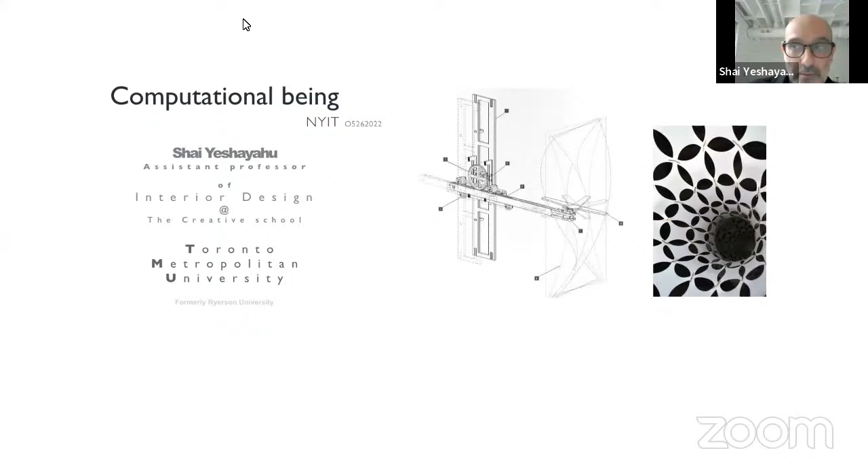Thank you, Pablo. It's great to be back. I think it's the same group that we did the workshop with, right? Yes, exactly. Yeah, it's fantastic to be back. Hello, everyone. Being an alumni, I have to kind of say it. It's kind of coming back and lecturing. So it's always a great energy.

And to support the MS in Architecture Computational Technologies program that you guys are taking, which I think is one of the most cutting edge sort of programs, or at least in themes that are really prevalent to our times. So you are engaged with the most current of current, so to speak. However, despite this online platform that precludes me from inhabiting your physical space, although I think none of us is in a physical space, I have thought a lot about this condition.

Although many believe it's okay, I don't believe as such. At least for me, it is not, because in some very specific way, this lecture is given by me, or at least intended to be given by me, in isolation, while all of you are collectively discussing ideas as a group, or soon will be, I guess, because you are on your summer vacation. Or maybe because the space of lectures in general have changed the ways we experience or encounter knowledge. And I want you to stay with me on that thought as I seek to explain the kind of environmental, social, and cultural shifts conditioning the ways we gain skills or develop tangible practices.

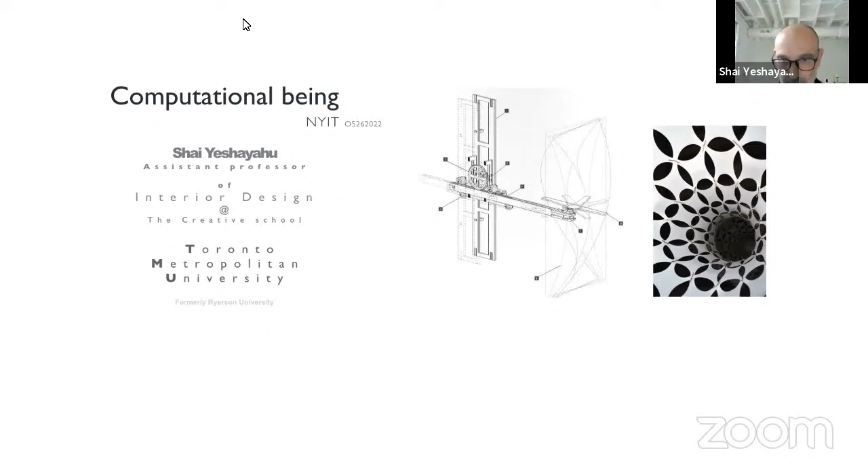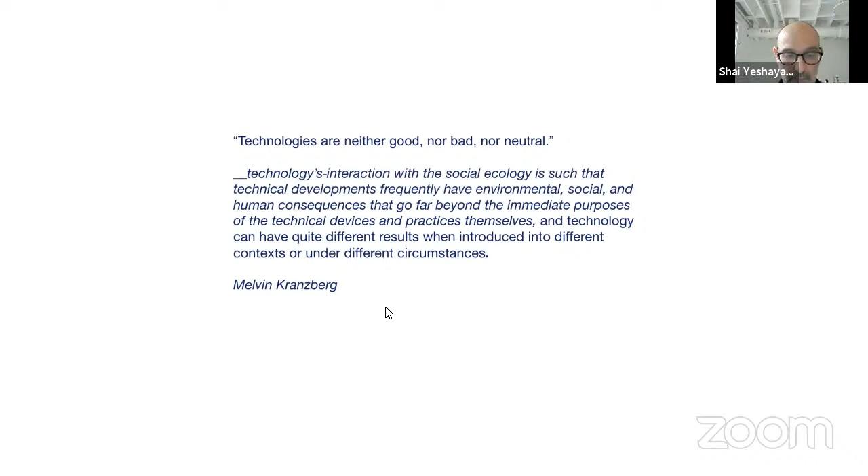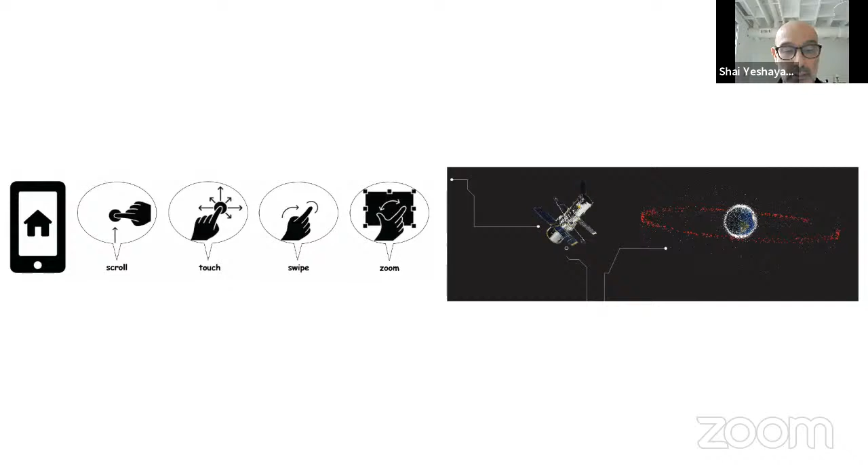In this regard, Melvin Kranzberg, a historian of technology, explained that technologies are neither good nor bad nor neutral, has triggered the specificities of this talk. He pinned the condition of our spatial definition in ways which I have come to recognize as computational acts. These computational acts originated millions of years ago, and they are not features from the arrival of the cell phone or microcomputer, not even the launching of the first geosynchronous satellite. And do not misconstrue this statement—each of those debuts are extremely important to our design discourse.

Yet the narrative of computational acts centers on a set of bones named Lucy, after the song 'Lucy in the Sky with Diamonds' by John Lennon, first performed by the Beatles and playing on the radio when paleontologist Donald Johanson was celebrating his finding with his colleagues. Lucy's bones evidence that humanoids are the first among our sapiens lineage to become bipedal and fully digital.

What that means to us in the design world is that mobility holds a superpower for all humanoids and perhaps even robots. That superpower started with the development of long thumbs and the ability to touch the other fingers, which in turn allowed us to firmly grasp, manipulate, sense, and control the things we find and shape.

Furthermore, being bipedal surrenders us with the ability to move in an upright position and to walk long distances. This ability provided a wider field of view that helped to scan the landscape around, leading to the recognition of environmental patterns.

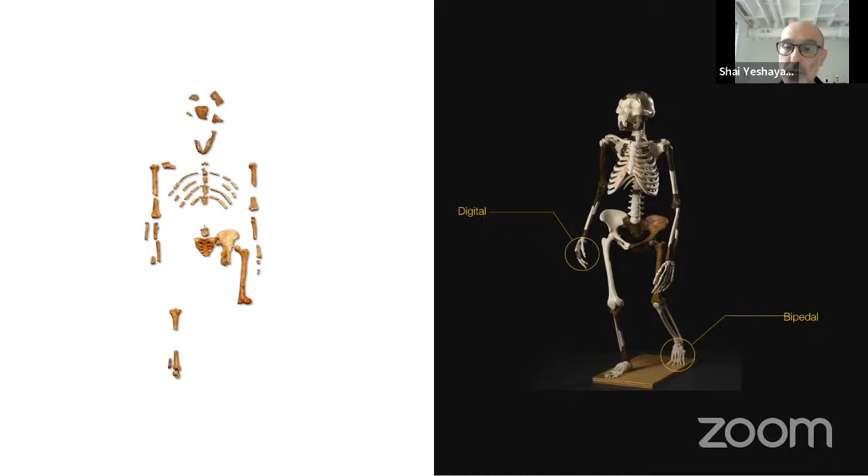In 3.2 million years, Lucy's kin learned to decode, code, and recode Earth's surface. They first navigated in the savanna, and then they learned to reproduce Earth's bounty as they moved across continents. By the year 10,000 BC, roughly 12,000 years ago, Lucy's descendants developed the first sedentary system that we now define as husbandry—cultivation of crops and animal breeding, which is also the rationale that propelled the invention of the room.

These rooms became cities, empires, and economic hubs that led to the emergence of the global city. At every one of these stages, social and cultural innovation gave rise to advanced technologies that shaped and formed the characteristics of the computational being, or the computational acts into being.

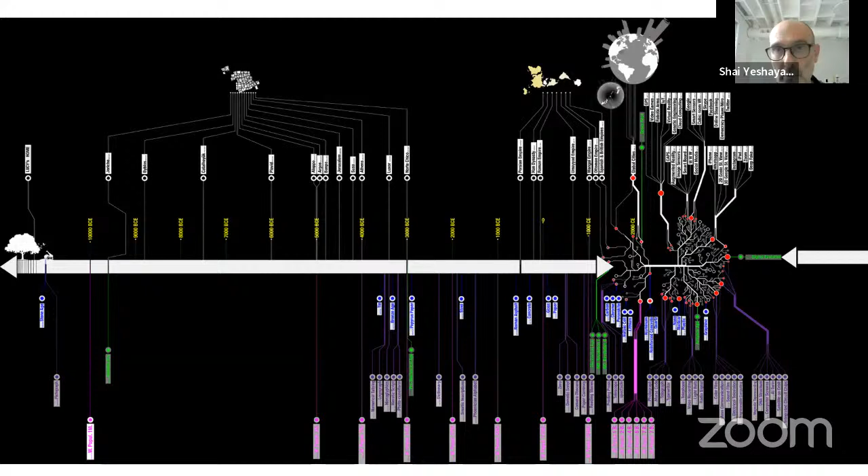This computational being has roamed Earth progressively, programming tasks that now a computer is able to decipher with ease. In this context, I will argue that sapiens are computational beings that in less than 500 years advanced light from candles to kerosene lamps, electric light bulbs, and to solar panels.

Transportation methods evolved from horse-powered to steam-powered locomotives to electric trolleys to gasoline-powered automobiles and electric vehicles. Communication systems like pictographs on cave walls, alphabets, books, telegraph, phones, and apps were propelled by knowledge and technologies.

As you can note, in less than 25 years, we have become avid miners of data, capable of mixing and matching knowledge that enables us to experiment with technologies.

As computational beings, you and I have reached a moment in which we can go back in time to understand the different technological atmospheres we have produced, and to grasp the spatial interest each of these technologies serves or served. We can see how applied knowledge produces different circumstances.

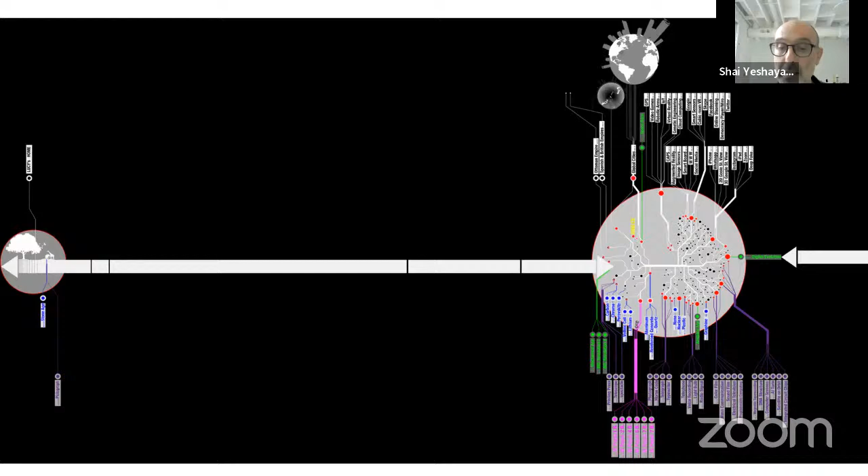And if we look at the history of our design processes, we can realize the duration of time it has taken us to get here. Hence, the question we are facing is not how did we get here, but how do we proceed from here?

Because it is evident that in less than 50 years, we have arrived at a digitalized condition that has radicalized our design practice. In less than 25 years, the computational being, in tandem with social-cultural aptitudes, has evolved into a manifold of modalities—ways of acting and generating multitudes of solutions.

In my case, as the system of communication evolved, so did the focus on ancient, local, and emerging knowledges. And this impact will be illustrated through three projects to render a provisional argument about the relationship between the morphogenesis of technologies and design thinking.

It is a kind of self-reflective tool, a tentative approach to look at innovation as an essential medium—or mediums—that in return are helping me to consider a range of circumstances for design thinking.

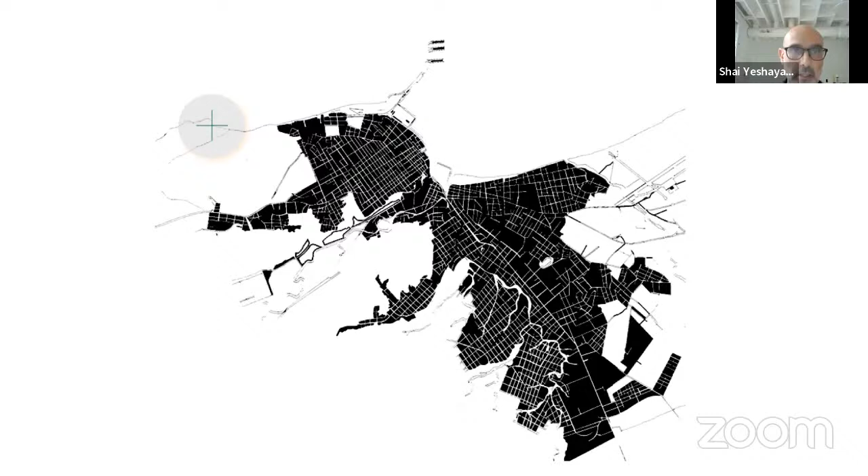Nonetheless, on the ground, the prevalent condition was a lot of use of concrete to laminate the ocean front or the hillsides that face the ocean to avoid erosion, which was a solution that seems a bit odd at the time.

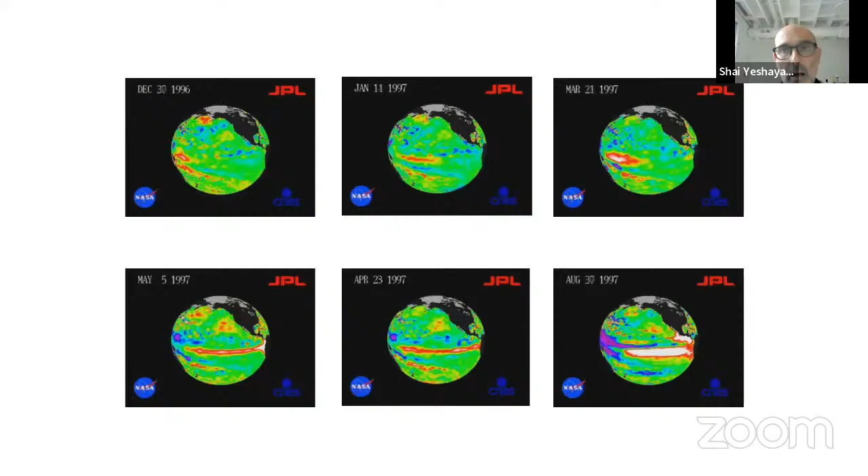We also looked at satellite patterns that were available to us, amplifying specifically here in '96 the phenomena of El Niño, in which warm water starts to approach the Pacific coastlines, creating multiplicities of effects in terms of drought, rains, and so forth, affecting the region.

So for us, we like to look at things in ways that help us understand or plow through what are the important things. So we are building a certain matrix that was interesting to us, looking at forces that have to do with technology, economics, sociolinguistics, and then seeing how they fit into these bodies of knowledge that exist, and how each one has a definition within those bodies of knowledge, constructing this matrix with a bounty of ideas that could be brought into what we want to amplify.

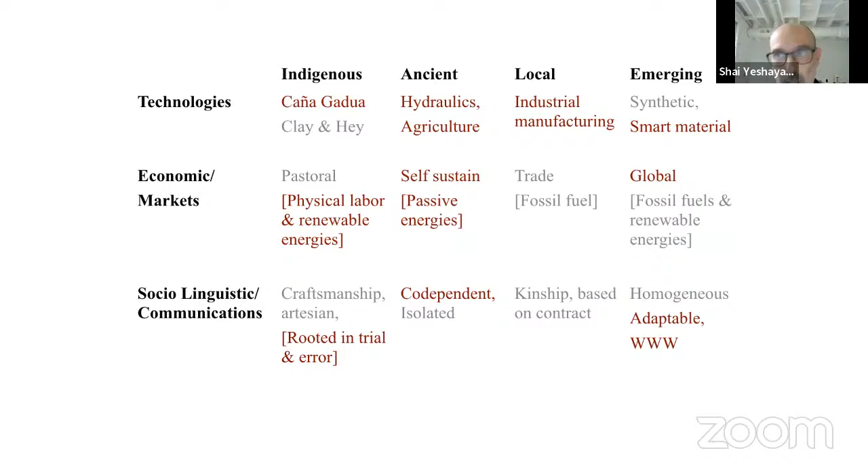Out of those, there are only specific ones that begin to inform the making, the doing, or the thinking about the design. So we constructed a matrix that begins to explain the evolution of a typology, and then the breaking down of this typology into site, circulation, and landscape, bringing all of these elements together to create an object, an optimized object that has ways to look beyond itself and also a way to center things around itself.

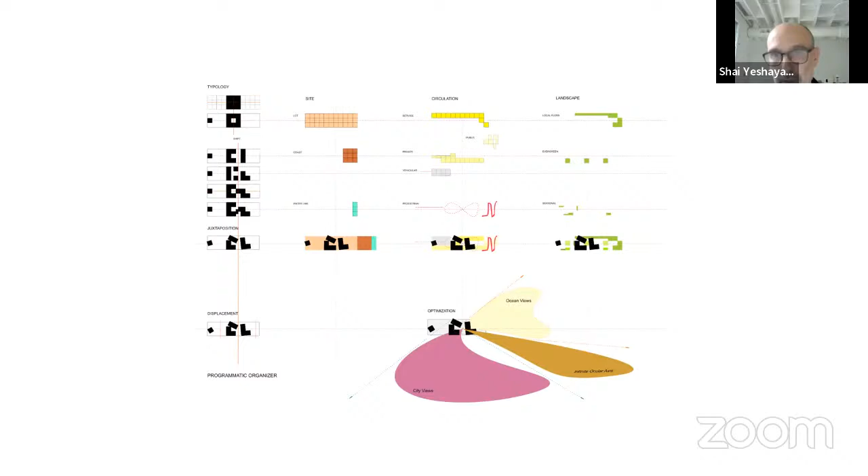So I'm going to focus on the area where the skirt was first treated, and the idea for it came from Machu Picchu. It's kind of like the ways of doing terraces because of the topography of that specific site.

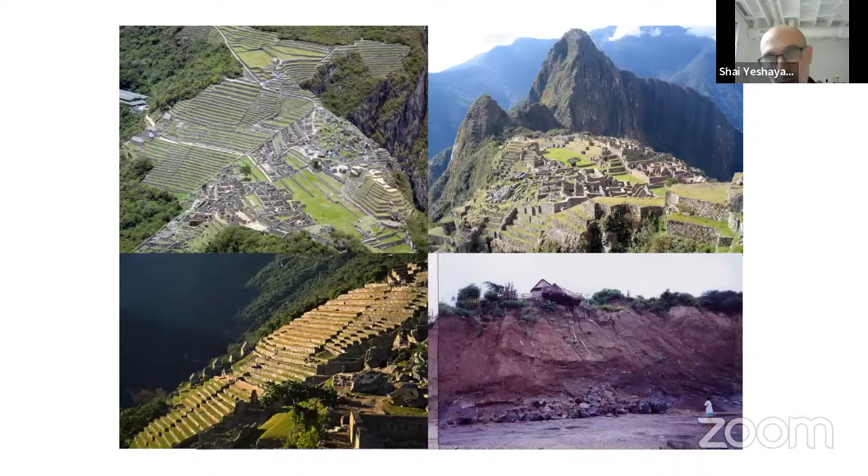And we thought it would be interesting to insert that as a pathway that leads from one place to the other, from the house into the ocean. We began to carve the hillside, and we found a material that is a geotextile, a smart synthetic material, that prevents erosion, and it works in tandem with vegetation.

So we created essentially a substrate to allow for vegetation and this synthetic material to work together to create an ocean front that is predicated on the unit, the house itself, being occupied and livable. Otherwise, the entire skirt also dies with it, because it's contingent upon the users and the recycling system that feeds back into this skirt and allows the vegetation to stay alive, especially in drought time.

There were other features that were incorporated into this idea in terms of natural ventilation, a passive approach to sustainability, and then the digging of a well that allowed for extraction of water at times when water was scarce.

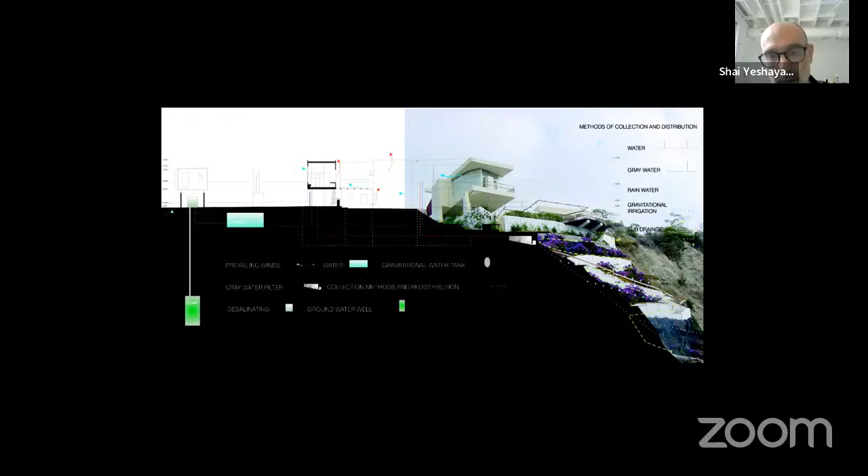Some pictures of the interior of the house, or exterior and interior, negotiating boundaries, which I don't want to discuss so much.

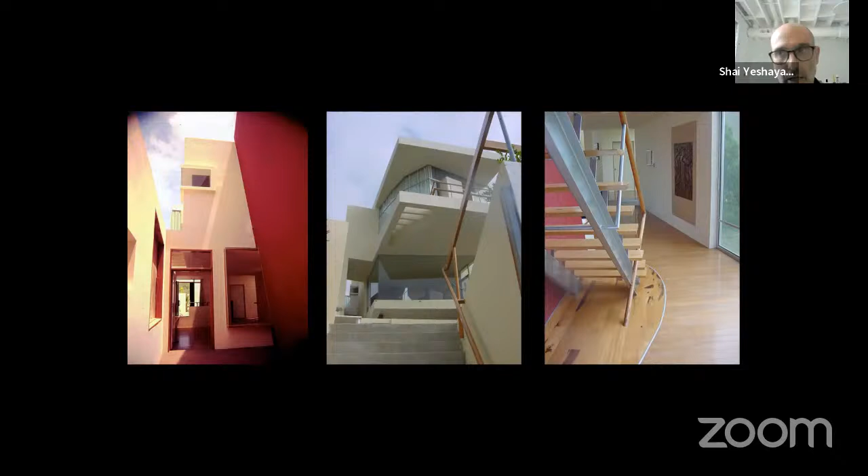And then the object, the house itself, and the relationship to the city, relationship to the ocean—where am I coming from and where am I going to—I think becomes an internal dialogue and an external dialogue within how the house was conceived to act or to perform.

At Hangar 9, which was a music venue in Carbondale, Illinois, Midwest America—it was a town where I was teaching at the university there—a storm, I think it was a tornado, came by and basically lifted up the roof of this building, rendering it completely obsolete, not up to code, and not even able to be thought of as an approach that looks at using the existing to make something new.

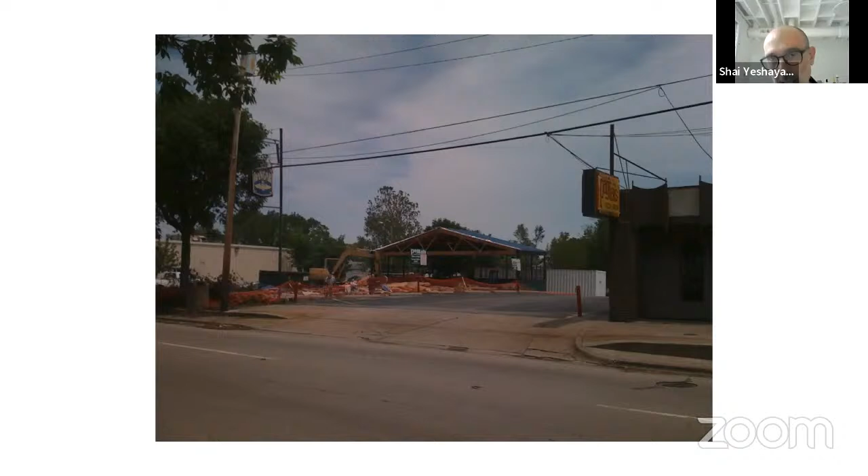That was not possible. The entire building had to be demolished, and because of this opportunity, we wanted to think about what else we could position on this site and how we could play with the intricacy of the program.

The program had three elements essentially: the outside beer garden as they call it, the music venue with the stage, which is on the extreme left in the plan; opposed to it is kind of like a dance floor or a place where spectators could habitat; the entrance zone; and then the bar that parallels that.

And then we were able to add a mezzanine level without adding an additional code complication into the mix of things, because when you add a second floor, there is, depending on how you do this—and we did it in such a way that it was not really a floor, but a mezzanine—and it put us in a place where we did not have to comply with such strict codes, especially when it comes to fire and occupancy.

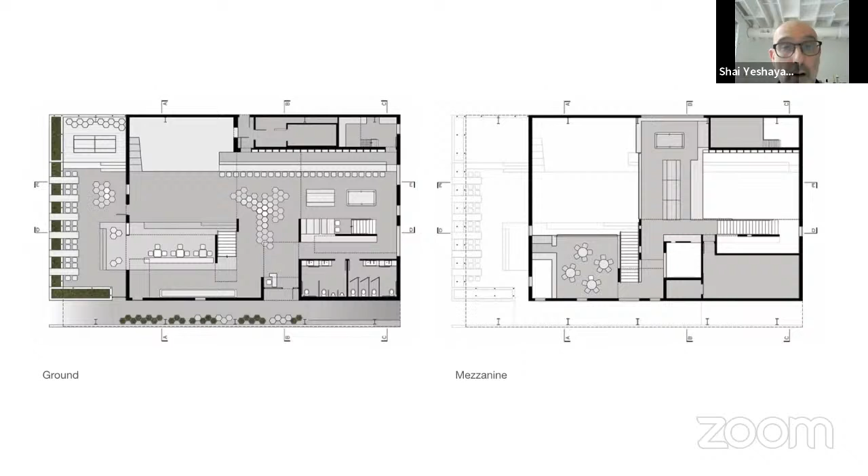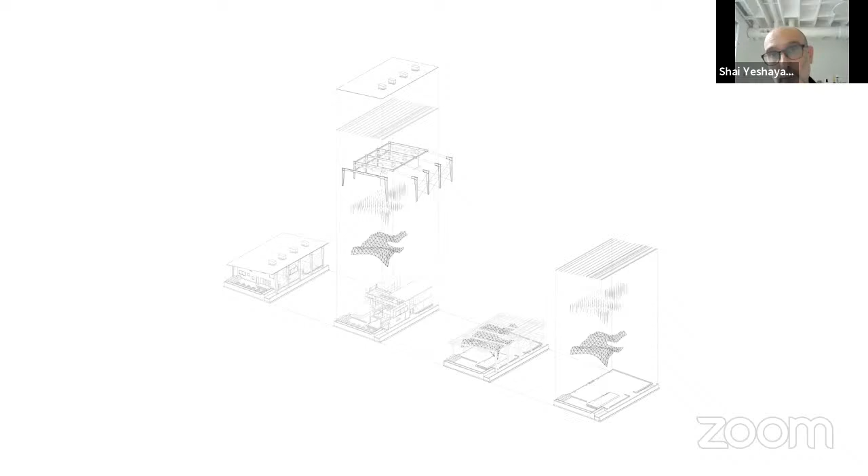Within this building, we looked at a typical steel frame and how we can take this typical steel frame and translate it into a new vocabulary, or compose something new with that same vocabulary. It's kind of like we have a kit of parts. How can we think with this kit of parts in ways that serve us, rather than conform to what the kit of parts gives us?

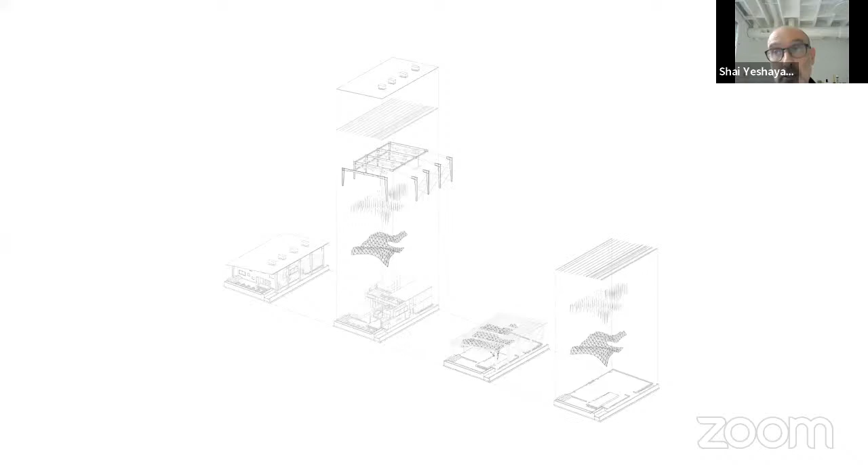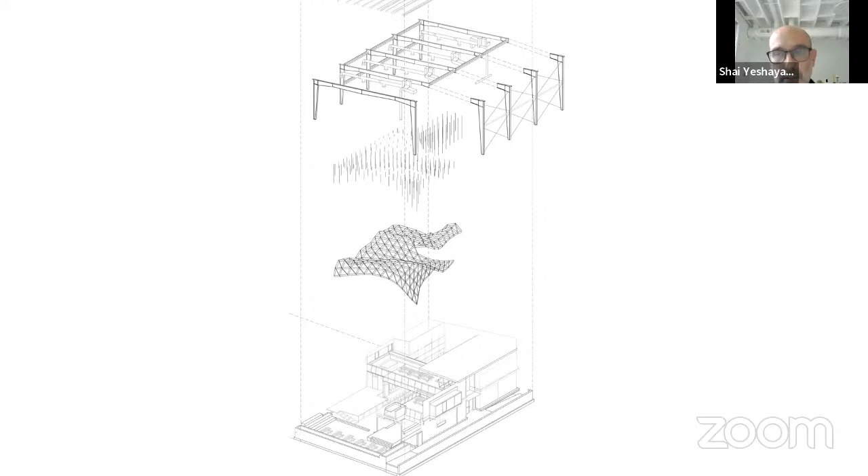Within that, we developed an acoustical ceiling that was part of a response to the musical venue, to allow for an acoustical barrier within the space, or to amplify or improve the acoustics of the space. There's an animation missing there, but that's okay. It was a question of performance and how you allow the space to function while a music venue is taking place, controlling the acoustics to some extent.

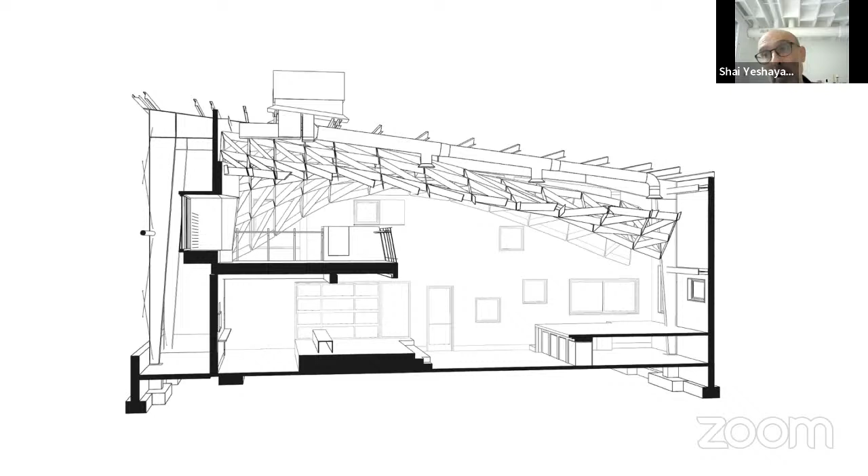So what you're seeing in the center, that mesh, became a ceiling, and the ceiling was optimized to work in tandem within the section. What you're seeing is the stage on the right and the mezzanine on the left, and the viewing platform below that. Here is that animation.

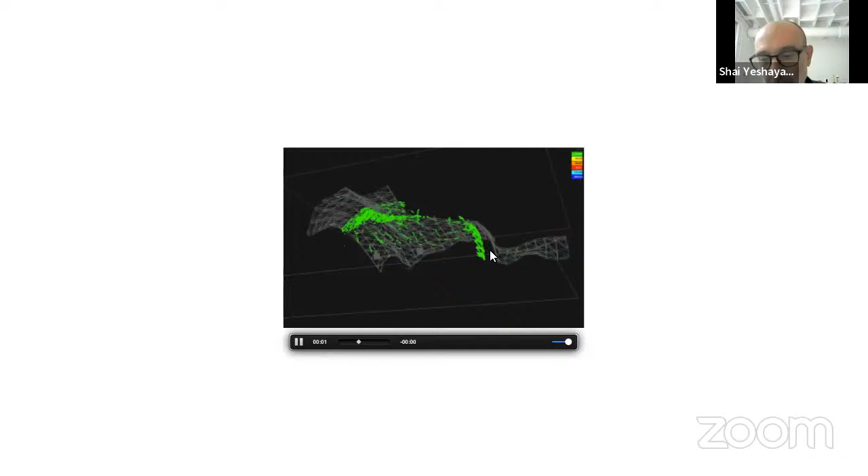We simulated sound from a source, throwing it towards the ceiling geometry, and seeing the amount of reverberation being given back to us, adjusting the geometry based on these readings.

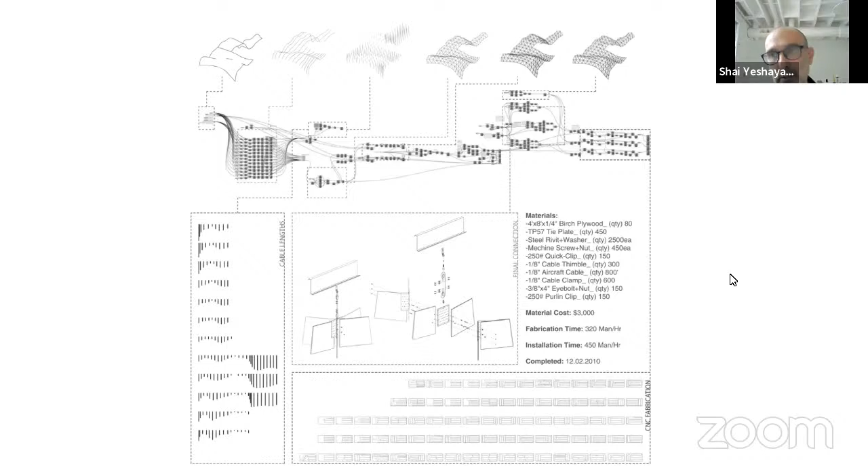Those triangles then had a certain thickness into space. And lastly, the connection, which you see in the middle panel between four struts, was developed around a four-way connector that allowed us to inject this ceiling into the space, for it to provide a blanket that ties the two spaces together, while also providing an acoustical solution to the programmatic need of this build.

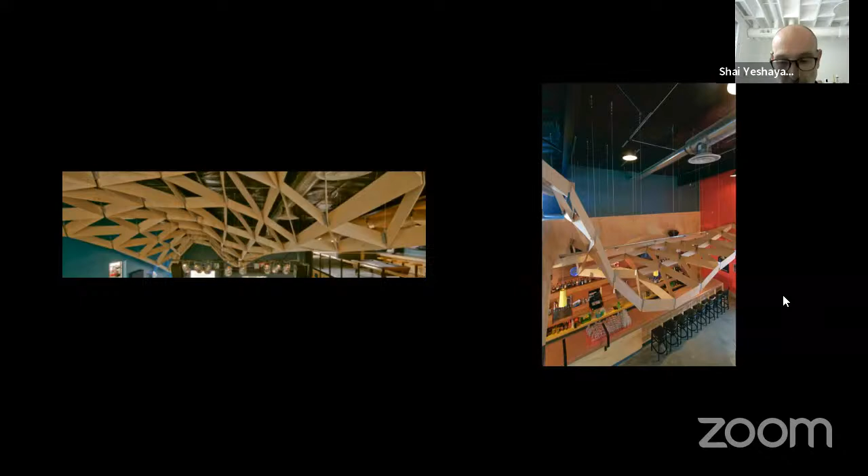The robotic zigzag is essentially the research work in progress I'm currently working on. It takes the zigzag chair, a very iconic chair, and tries to rethink the making of it, which has been done extensively by Rietveld himself, but also by contemporary people like me in this century and the late past century, where this chair has become a fascination as to what material can represent it. For me, it becomes a fascination of what technology can make this chair, and whether robots could take the challenge of folding something that has a material continuity to it and is not broken down.

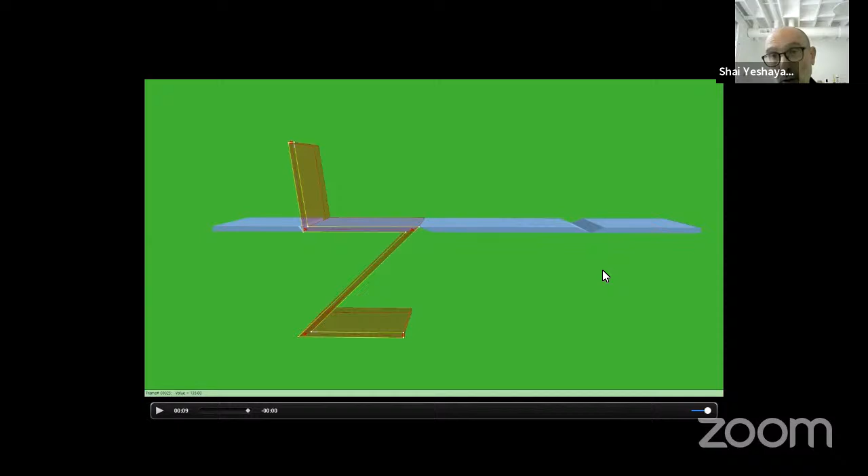Looking at this chair, I began to compare and contrast it to chairs that are not only iconic but had a similar mindset of continuity and flat pack. I think the Ombra Tokyo by Charlotte Perriand is almost like a flat pack - you can flatten everything into one sheet, and it becomes that. You can cut that chair out of one sheet.

And then Laarman, Bits and Parts, a complete 3D printed chair as one piece. So I think that gives the understanding that continuity was important for Rietveld in his entirety of thinking and philosophy - the continuity of space, or the infinite space, which was always at play in his design thinking.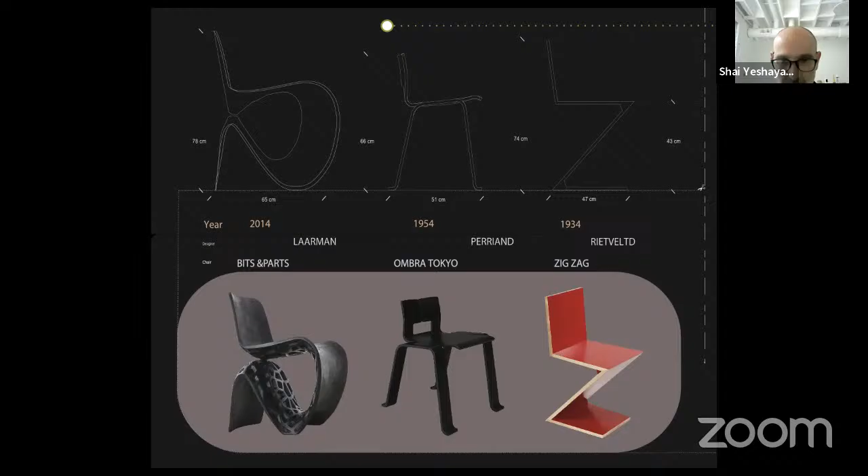Looking more carefully at the construction of this chair at that time, I think it's clear that there was a certain constraint, not just by looking at the chair, but looking at the array of work that Rietveld produced as a continuous experimentation with the way the zigzag can manifest itself through materials, combinations of materials, and the technologies available at the time to achieve something that looks seamless.

Although the first part that is made out of wood looks seamless when it's constructed, it's still made out of single parts that are attached together.

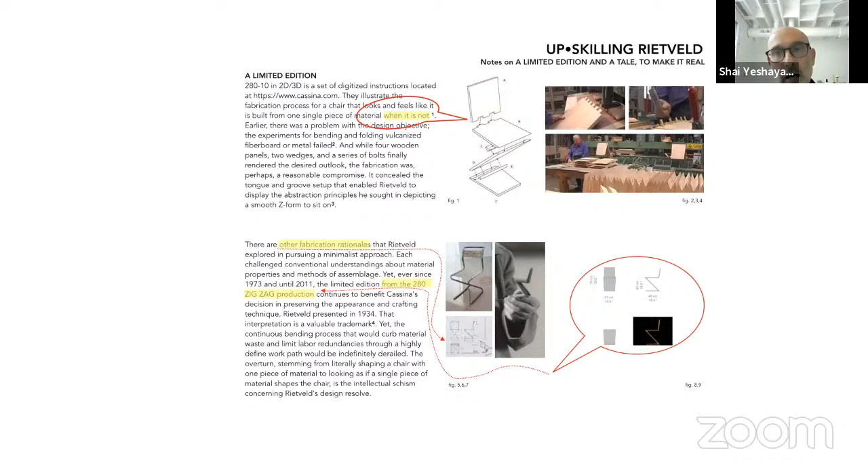The tubular one is one of the interesting propositions. For me, it really represents continuity or infinity in much more clarity. But it's the absence of the planes, and it's more about the delineation of the lines in space, allowing certain planes to exist to allow the seat and the backrest to become what they are. It's more about the construction of a continuous tubular form that then gets additional materials layered into it.

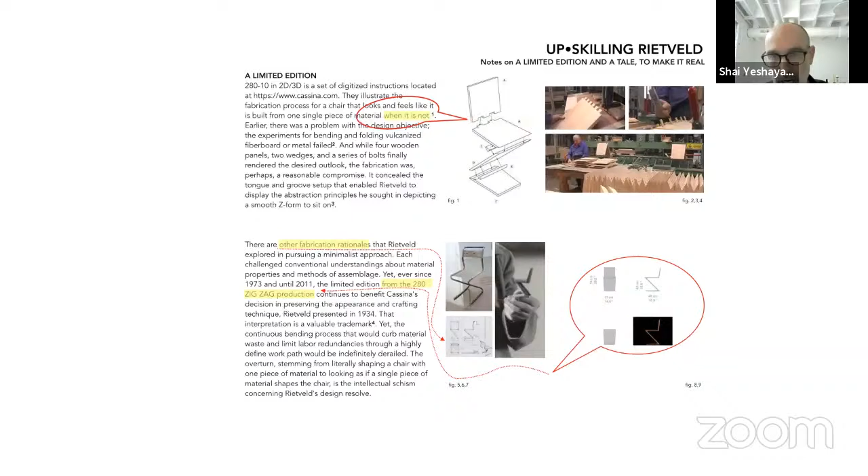Laarman, with his RoboFold, I think has introduced a completely different way of thinking about how we look at patterns and techniques in which robots attach themselves to a pattern and move about a particular axis in space to allow for folding to occur.

What you're seeing here are not really full-scale chairs. Their chairs are about this size, not that big, but it was more like a proof of concept. Can robots really fold the chair? I think that exemplified that this possibility is very much attainable.

For me, looking at all of these arrays of thinking and techniques and understanding about technologies, and what we currently do or did with them, it was pretty evident that the robot will be only one piece within this process.

There were other additional things or technologies that would have to come into place to accommodate for the making of what I wished to explore, which is a continuous surface that gets folded by a robot and allows for the creation of a zigzag shape, not necessarily a zigzag chair.

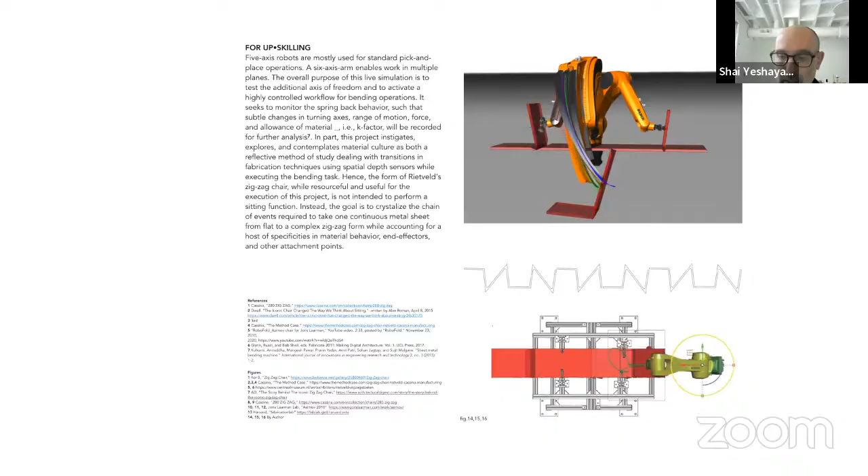So the shape itself is of more interest to me because of a particular constraint I'm going to get to in just a second, that has to do with a uniformity, an ability to create something from a singular material that does not require additional assembly. So the product can be produced by virtue of creating these sheets.

Sort of like the strips. When you unfold the chair, it becomes one strip divided into four segmented parts.

Initially, I was thinking of a jig, sort of like a bed that the robot will perform over, and the bed will have a certain adjustability so the robot can move around it. That proved not to be so effective through simulation, because it required the robot to move quite a bit around the table. It did not serve me in the way I thought it could.

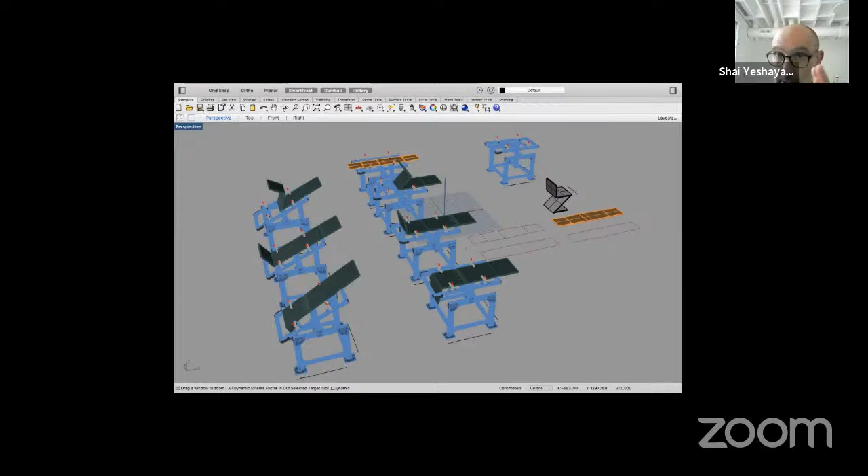It actually created a bigger problem because you never have a fixed bending edge. Therefore, every time it requires a new adjustment or new calibration for every fold, and that might achieve the zigzag shape, but in a much more complicated manner. Maybe there is an easier way to produce this.

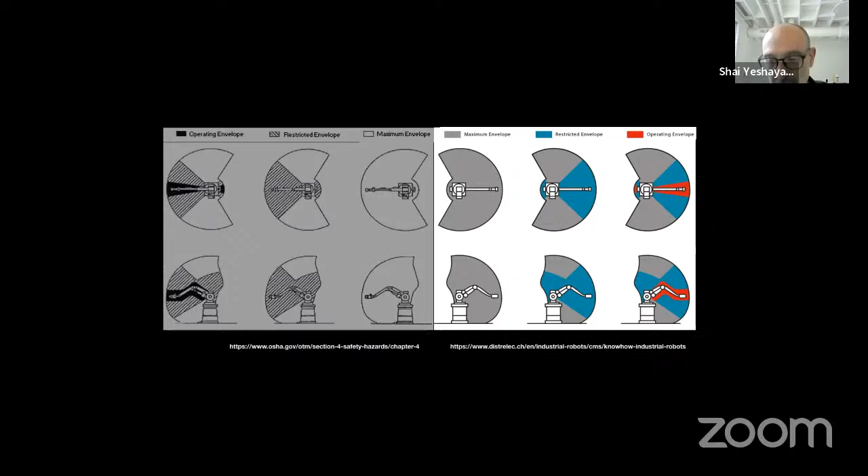At the same time, I was looking at the robot and the environment and restrictions that exist around it. Looking at what OSHA defines as areas or zones of safety around the robot, and what else defines the areas in which the robot performs. You can see the two analogies between how an institution represents this diagram and how somebody from industry who is particularly interested in robotic reach thinks about it. Where does the reach of the robot end, and where does it begin, and how do I work with these constraints?

In terms of just, if I keep bending a metal, at one point it will kind of break and stretch out. So where is that break point? At the same time, I was very curious to understand the spring back. So when you push a metal, there is always a pushback. The material kind of has its own memory and wants to come back.

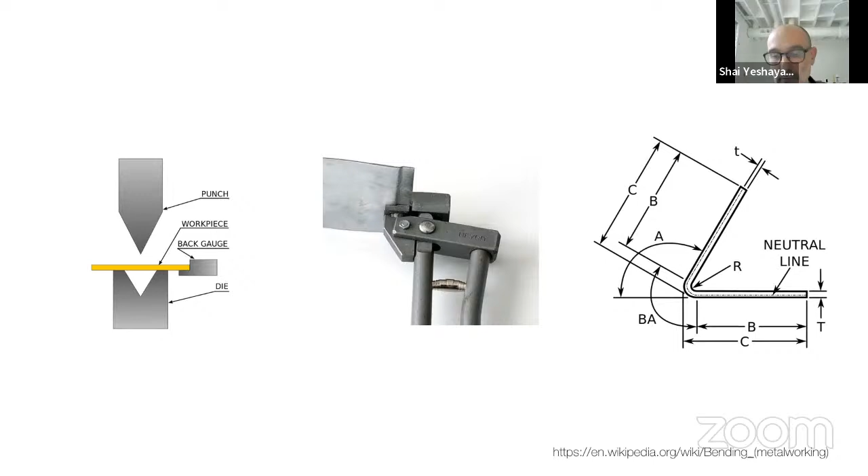That was a factor that became really interesting as I am trying to fold and reach a certain degree, and I'm not able to do so yet because you need to push more to be able to get less. There's about 10 degrees - if I'm pushing an 80 degree bend, eventually I'll be getting something between 70 to 75. There's always 5 to 10 degrees that are somewhat lost because of the material logic itself and how it behaves.

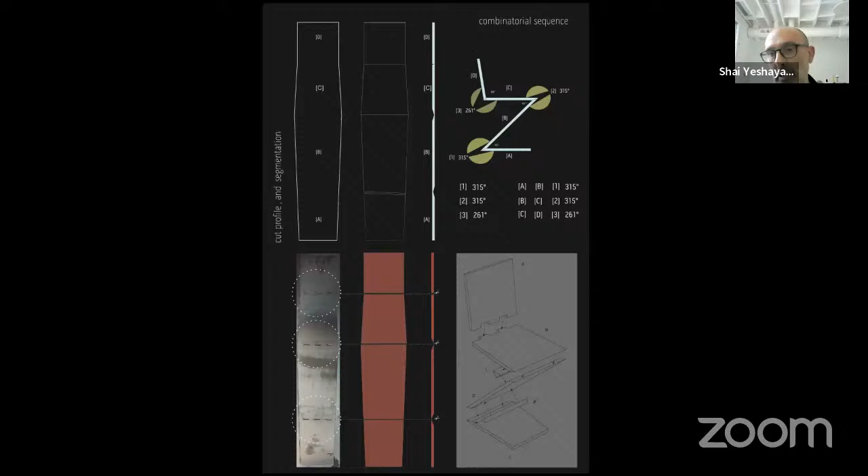At the same time, I began to look at the 3 joinery areas, the angles that exist there, and the complication that brings within it, in the sense of coding a specific system of angles and understanding where does one begin and where does one end. That really has to do a lot with how the robot is working around the chair, or around that sheet of material, to be able to create essentially 3 bends, which are seemingly fairly easy, yet the challenge of producing a 135-degree bend can only be done on an up push as opposed to a down push.

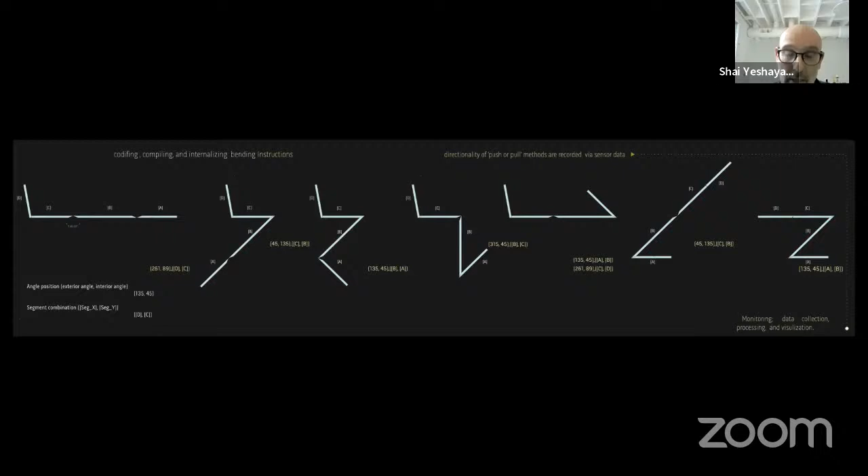Which are those 2 techniques that I'm sort of exploring within this process: one is pulling the material with the robot, or pushing the material up, or the other one is pushing the material down. And that has to do with the specific angle that I want to create, and then working around a particular bending edge that has to be calibrated for this.

So within this process, initially, I thought about doing this with vacuum, with air pressure, which was simulated very easily in this - or at least it gave the understanding that this is very much feasible.

And while this sort of robotic action is taking place, there are various parameters being looked at in real time that has to do with air pressure, monitoring the air pressure. There is also a digital signal between the robot and the computer, allowing for on and off positioning. And then looking at 2 locations of temperature to see a variation of temperature on the material while the bending is taking place, and then timestamps on all of these things.

And at the same time, I was hoping to wire MPU sensors. Essentially what they do is they give you a location in space with 6 parameters. So you have a point that has essentially XYZ multiplied - you have X1, Y1, and Z1. You have a set of 6 parameters for each point in space, which is essentially 4D space, kind of defined within this set of parameters.

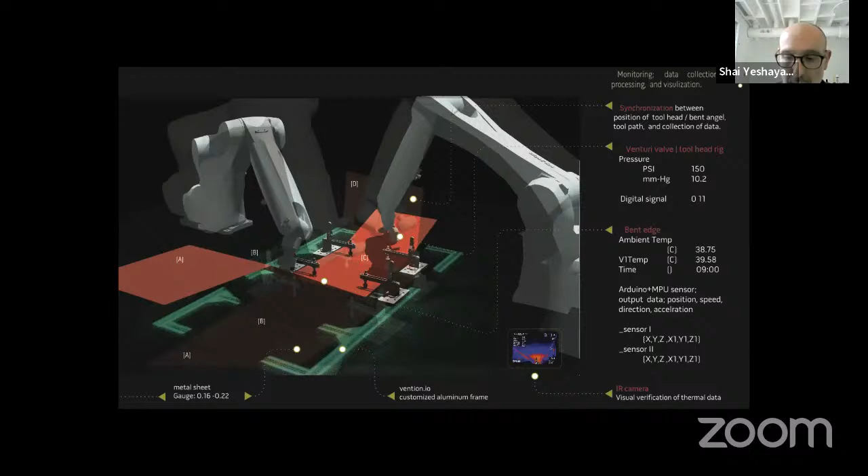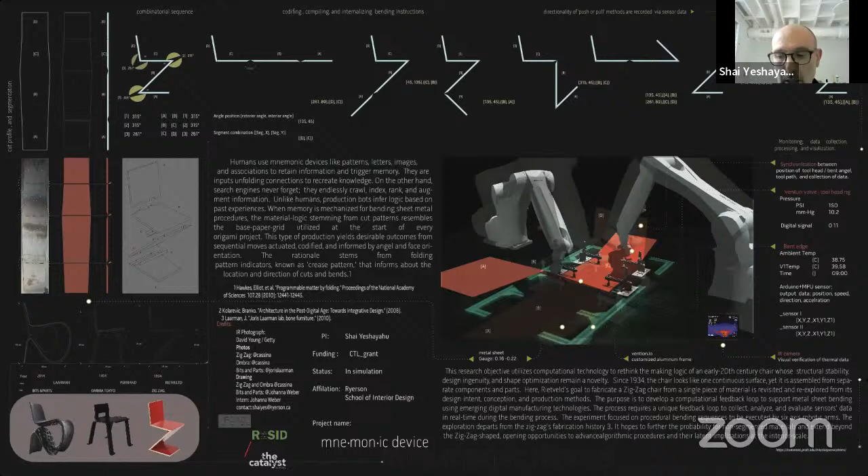It's kind of like the entirety of the board that I put at one stage to look at how, essentially for me, it's really more about the feedback loop that kind of goes back into the left side pattern template, and how the reconfiguration of that pattern, or the rethinking of the code, will then re-inform the processes in which the robot will have to go about to make this zigzag shape.

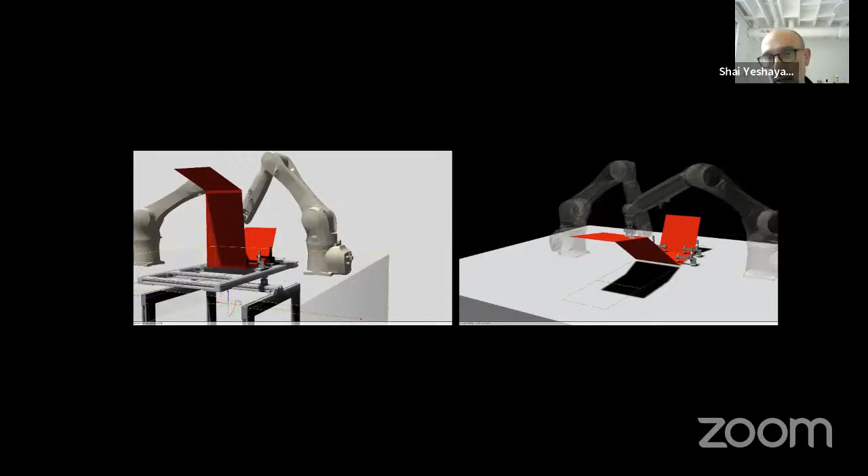So this sort of two animation - one, there's kind of distinct points of view in terms of showing how 2 robots could potentially collaboratively work together using vacuum suction to create this folding. I'm not able to work with 2 robots - we don't have the capability in the lab to synchronize between 2 robots.

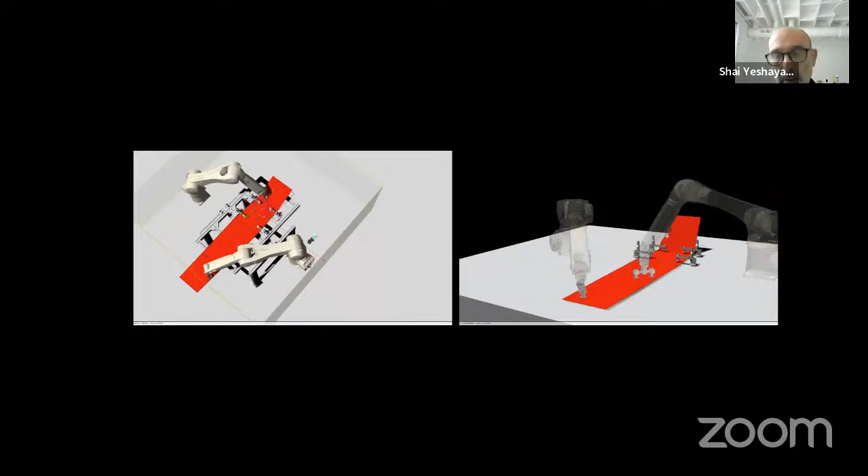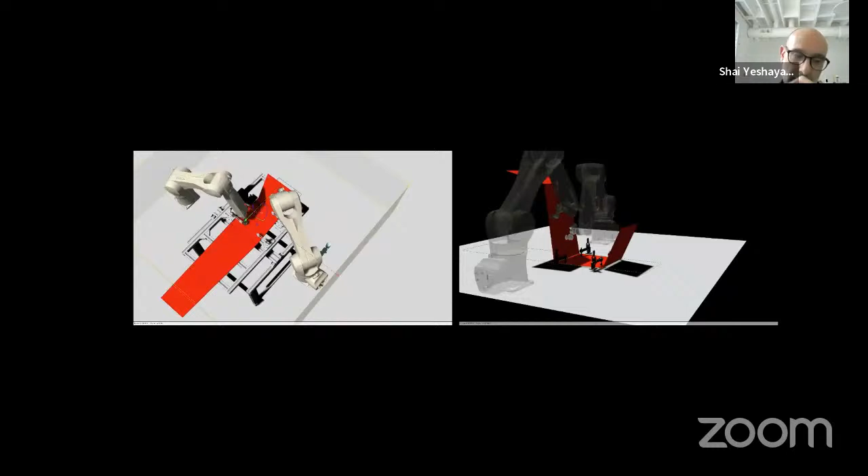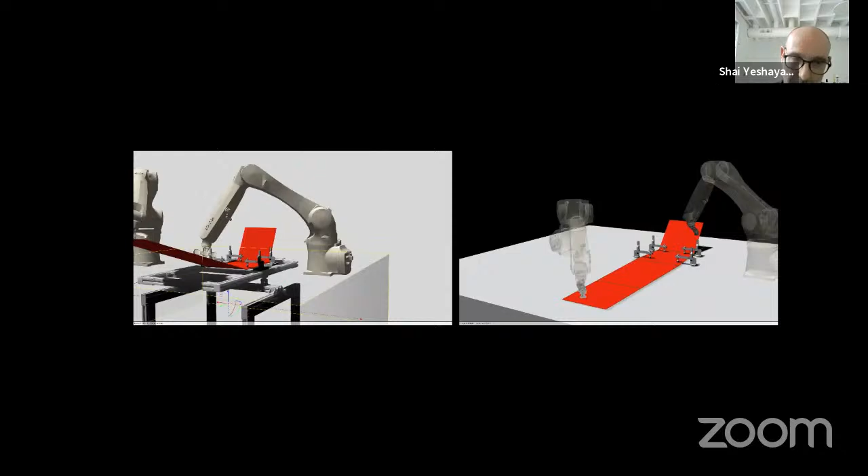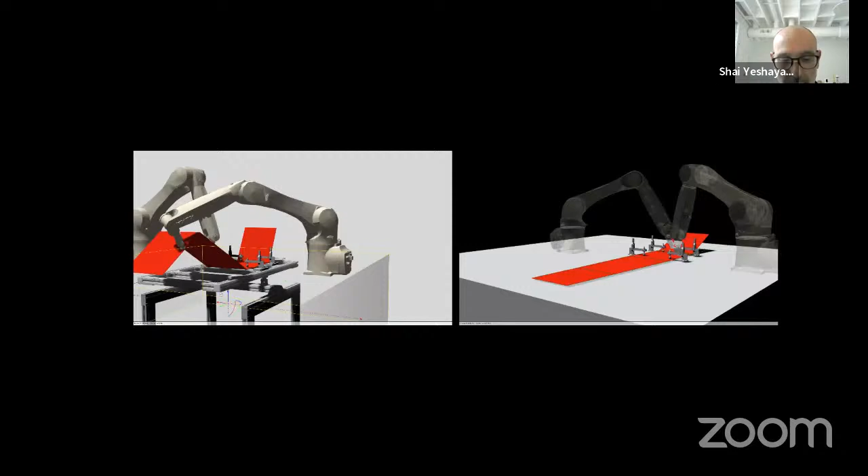The air pressure has proven to be extremely complicated to achieve enough suction force for the suction cup itself to stay in contact with the material while the robot is trying to pull. At one point in the beginning there is a complete disconnect, no ability for air suction to really hold, which means the suction pattern has to be redefined or rethought. The equipment required, the air pressure, the PSI, needs to be very constant to produce a type of suction that will allow for folding using vacuum.

At one point we had a UR robot in the lab, so I was working a little bit with it to see if I could fold with this small robot. I think this was a quarter scale template of the chair. I worked with eighth, quarter, half, and full scale in four different scales with three different gauges of material to see where is the give and where is the failure, where is the opportunity to actually bend and where is the opportunity to actually fail.

Part of this experiment was first run with the suction cup, which I don't have the video with me, and then it was run with the clamping tool attachment. The clamping did produce, was able to bend, and there were a few parameters that enabled me to understand there's got to be a certain level of precision in terms of how far or how close the exerted force is to the center of the bending, which is the line of bending. The further it is, the least intricate the bend is, and the least control it is.

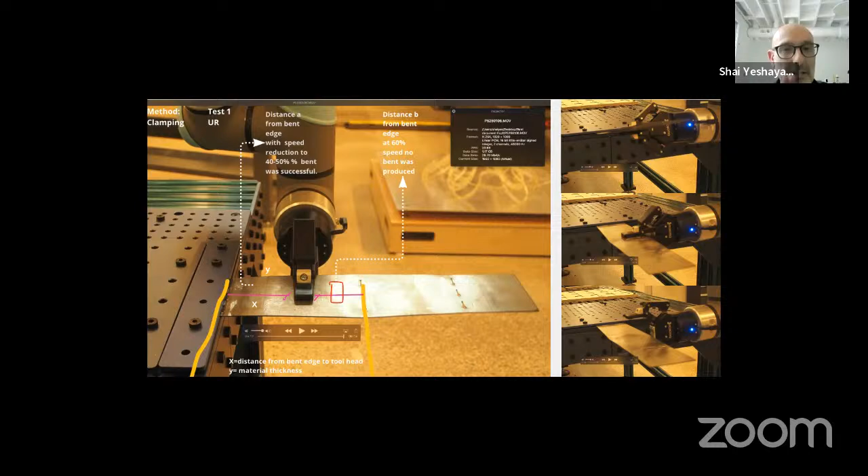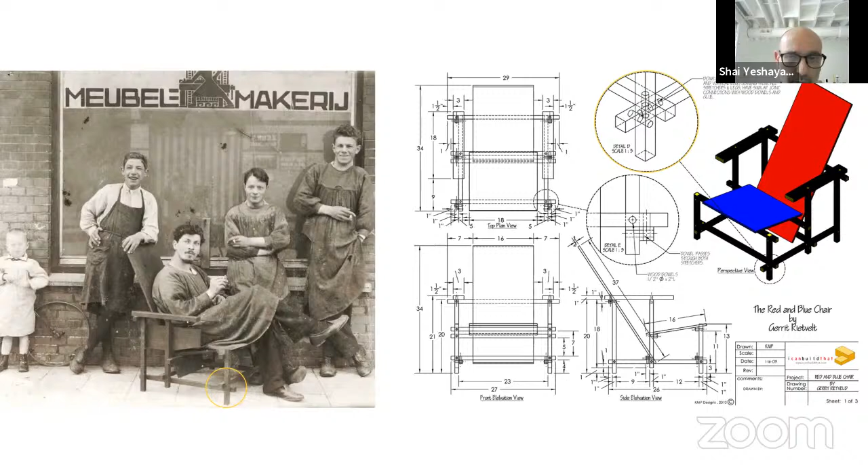I stumbled upon this recently, looking at some lectures about Rietveld and his theoretical thinking, or his technological thinking around material and around technologies that will help him construct those forms or realize his ideas in ways that are not singular, but in multiplicity. It also begins to suggest that the computational being, the computational thinking, or the computational acts are the ones driving us, whether we are conscious of them or not.

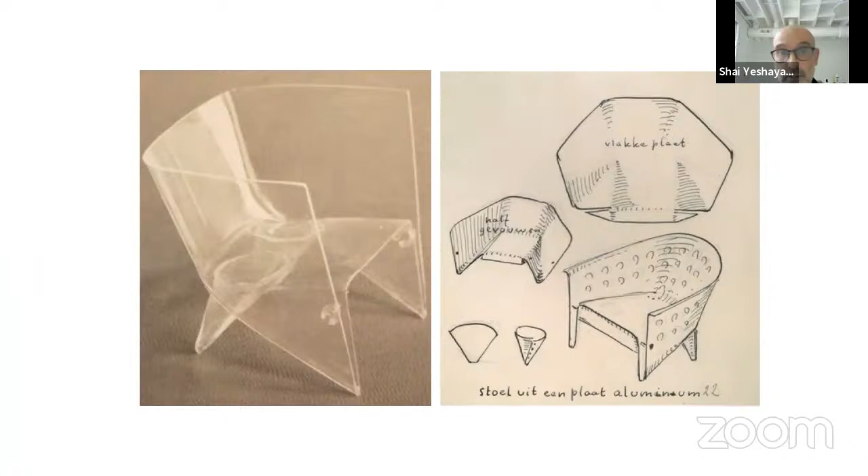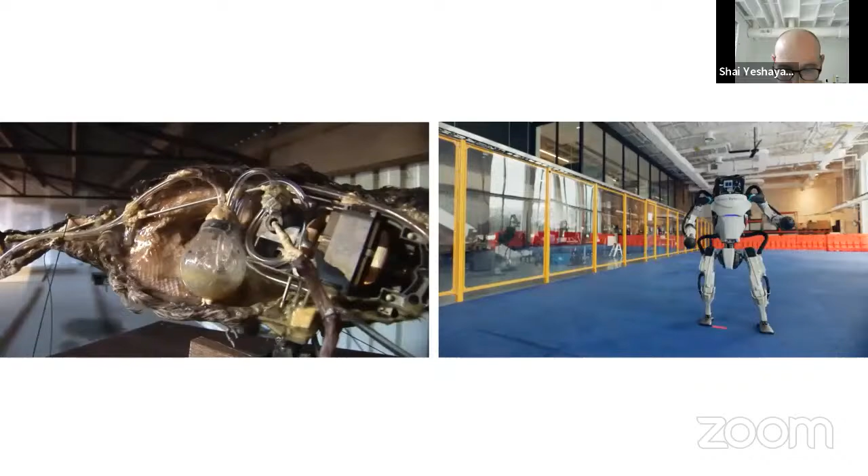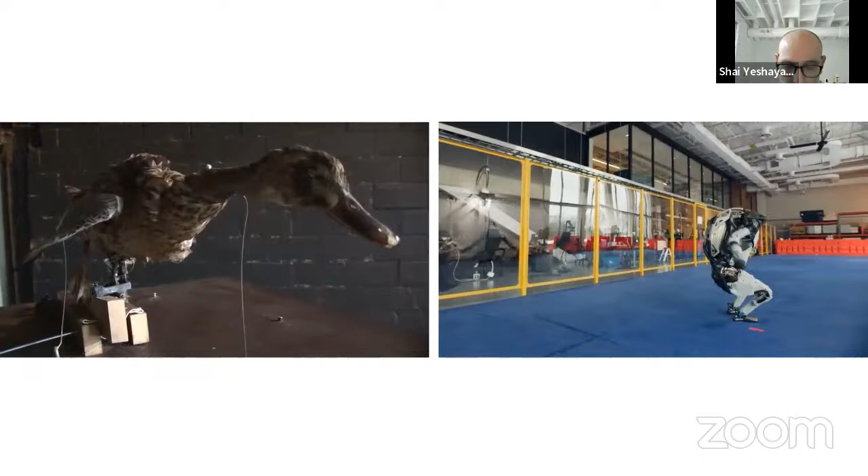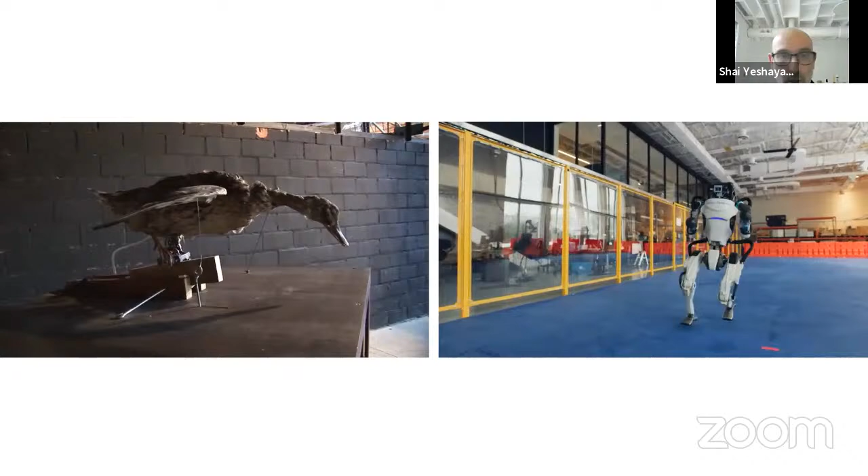Lastly, I want to leave us with this teaser about the duck that Jacques de Vaucanson created, the pooping duck, in 1739, which was then the most advanced robot. What we're seeing here is a replica of it, but back then it was the most advanced robot. And after 282 years, we are now facing the Boston Dynamics robots, which have almost near-human capabilities in terms of mimicking us, with extra powers of course built into that machine.

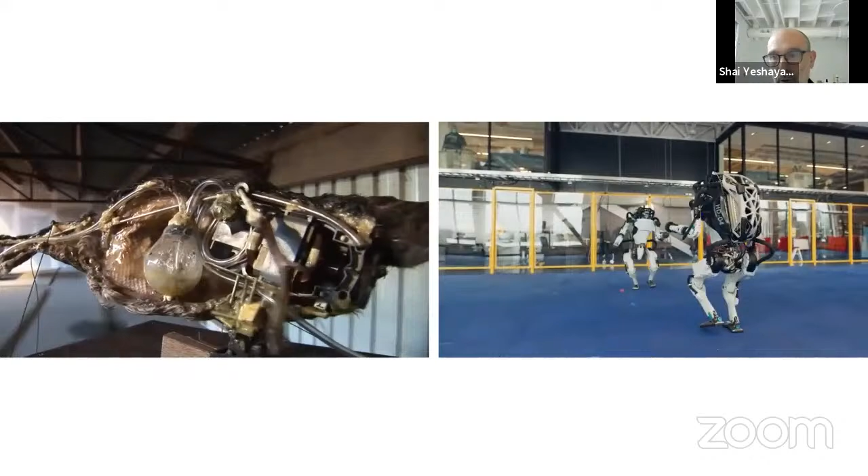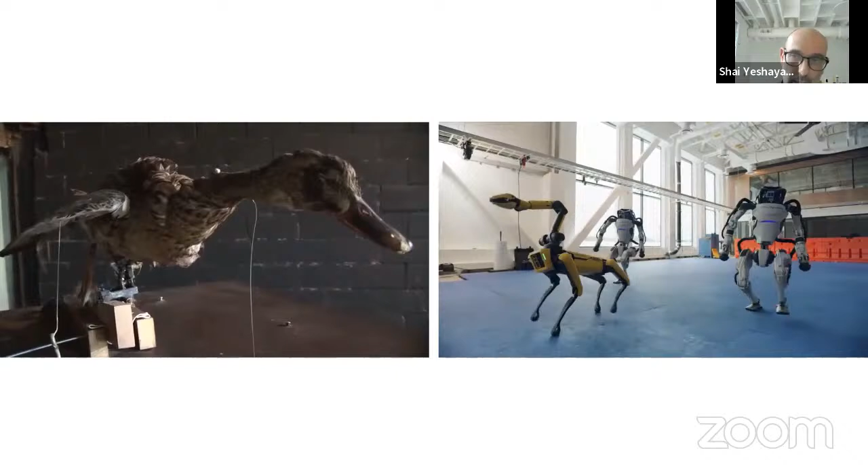But nonetheless, seeing the contrast between what has been achieved in the past versus where we are currently within this technology also helps us understand how the compression of time, especially at the beginning of the 20th century, allowed for a boom of knowledge to surface and inform us about our abilities and our ways of engaging with design and with making.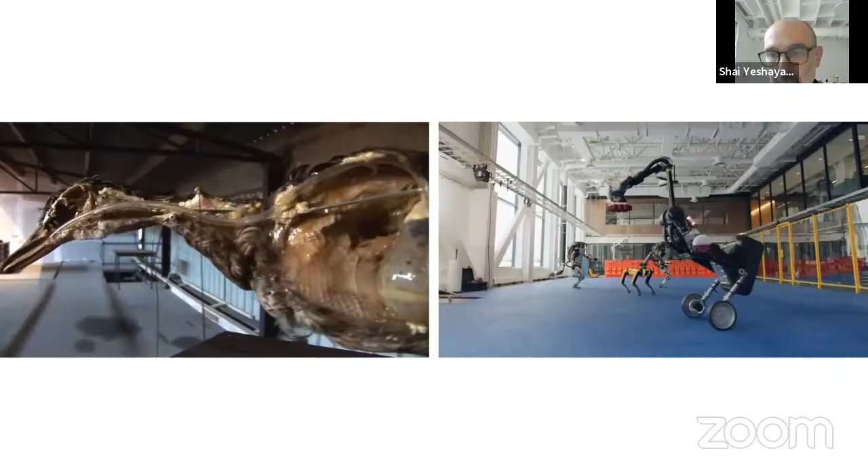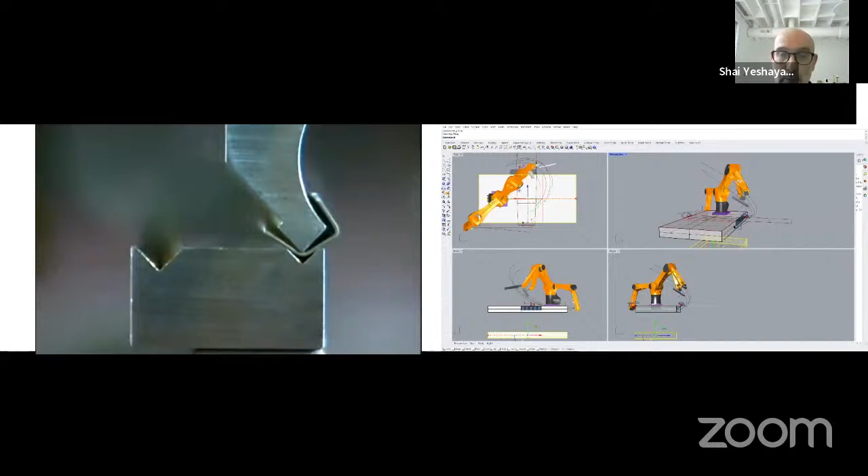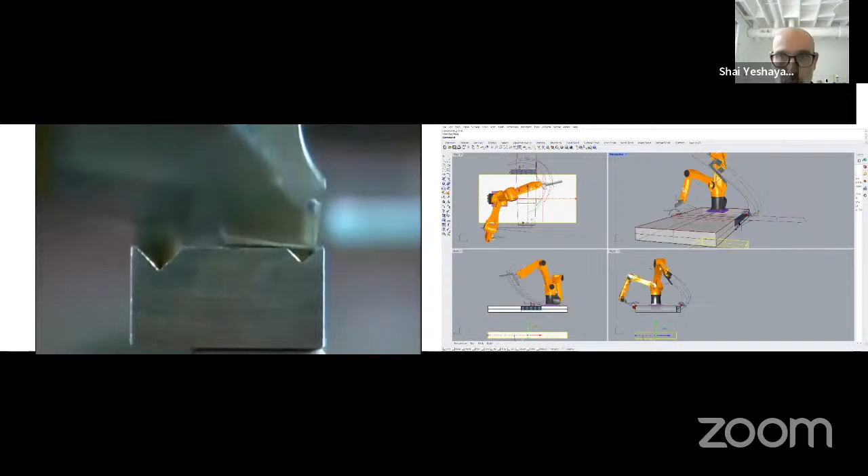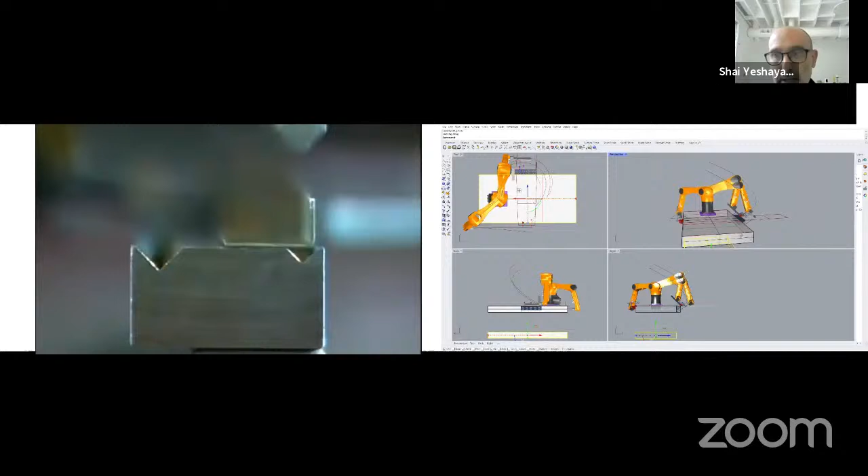So I want to leave you with, on the left, the traditional way of bending that I spoke about earlier, in which a punch pushes a material into a die and creates its pattern. While on the right side is me still working with simulation, trying to understand a method that will allow me to not only bend, but also understand the limitation in terms of how much angle I can really bend a material using a robot with a jig that I created. It's kind of like a bending edge that I rigged up so I could work around it. As you see on the table, it cantilevered out of the table so I can achieve above 90-degree bend in one direction, to then allow that to spring back into the 80 some degrees that I need, within this zigzag shape or this code that I have defined for myself. The forces applied during...